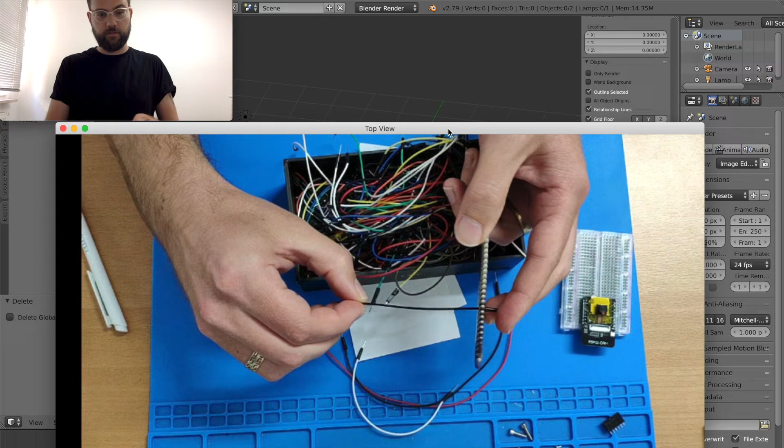The basic idea that I have is this: print a box that is shaped like a comb at the end, and we can just insert them like this. The box needs to be more or less the length of the cable, and we can just slide them in and keep them without getting tangled, and organize them by length and color, or print different boxes with different lengths.

We'll see. I'll start with the shortest one because this will take the least amount to print. If we have just this box and we leave gaps like this on the sides, just try to imagine it like this.

This will take ages to print because it will have to restart, recheck, and so on, and print the fans, and they will break off pretty easily because this joint here will be on a layer boundary, so it will just break off.

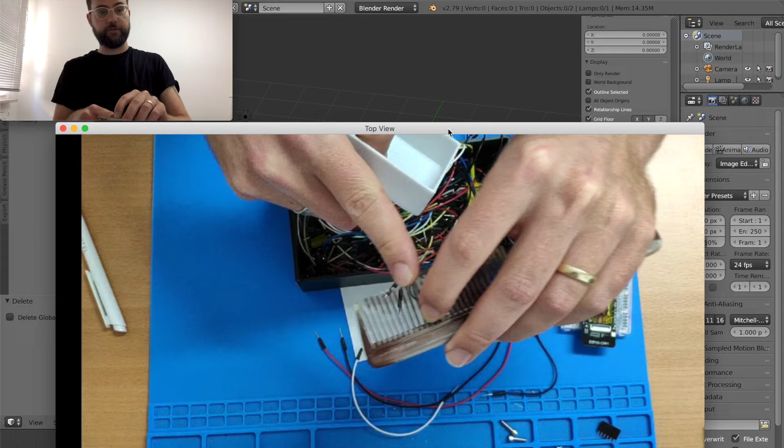And I'm going to challenge myself to come up with maybe a snap fit, so we can print it as one piece and then just lift it up and clip it together so it's a fast print and a durable model at the end that requires no other parts. Yeah, let's see how this goes.

Before I start designing this, I have to think about a few things. First of all, to get this mechanism to fold things up, my idea is to design it in the following way. That is idea number one.

If this is the floor of the box, here this bottom part, it needs to have a 45-degree angle, maybe a millimeter or half a millimeter gap with a single layer, and then it needs to have this 45-degree angle. So this will be exactly the joint where it will be folding. So it will fold inside here.

So I have the same thing, the gap, the angles again, and then this piece, and this folds up from the other direction. So it just folds up. This is the first idea. This is how it looks like in detail.

Now, designing this will be fairly easy. I have to just make up something that looks like this.

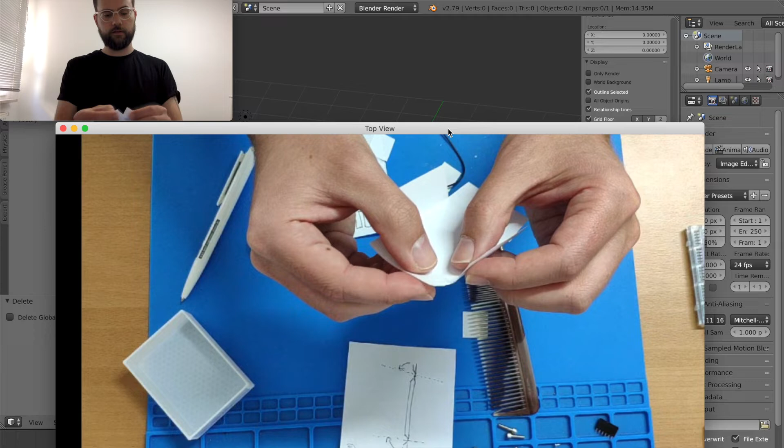And I need to find a way to make joints here, so if I make this a little bit wider on those sides, leave a gap here, design a little nose on this end, fold it up, it should just clip in, and it should not have any tension on any layer boundaries.

Let's see. It's going to go wrong in any case.

So this is Blender, and I'm just going to start by modeling the bottom main part and the sides.

I'm going to add a plane with a radius of 40 millimeters and size it along the y-axis by 0.5, so it's 40 times 80. This is where the cables will be stretched along.

Then I'm going to select this edge, move it to the center, grab it along the y-axis by 20, oops, minus 20. And because I'm lazy, I'm going to add a modifier, the mirror modifier, along the x and the y-axis, and then I'm going to move those to the center as well.

Grab it with G along the x-axis, hit X, and type in the number 40 to move it by 40 millimeters, and then it's exactly here.

If I take this edge, hit E and hit enter, then grab it along the y-axis, hit Y again by -2 millimeters. I get this wall bit.

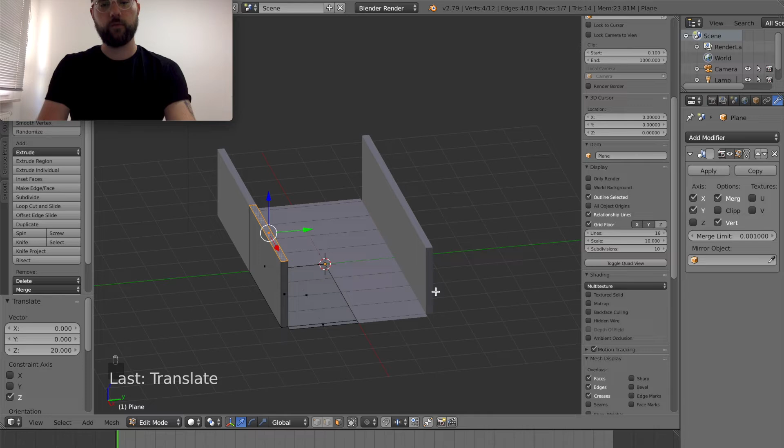Extrude it along the X-axis by 1 millimeter. Extrude it again along the X-axis by 2 millimeters, and then grab it along the Z-axis by 2, so at the other side.

This is 20 millimeters high, so extrude it again and grab it by 20 millimeters this side.

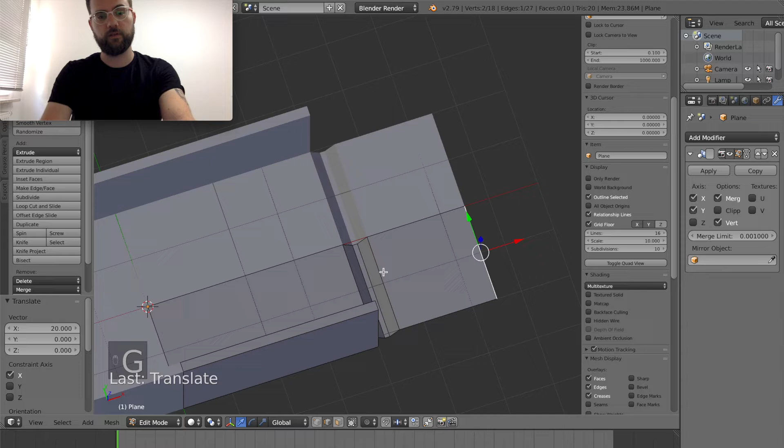So we have this. This will be the part that folds up, so extrude the edge, grab it along the Z-axis by -2 millimeters to go down.

This needs a thickness of 0.2 millimeters because I prefer printing at a layer height of 0.2 millimeters, so I'm going to extrude it again by 2 millimeters, grab that -0.2.

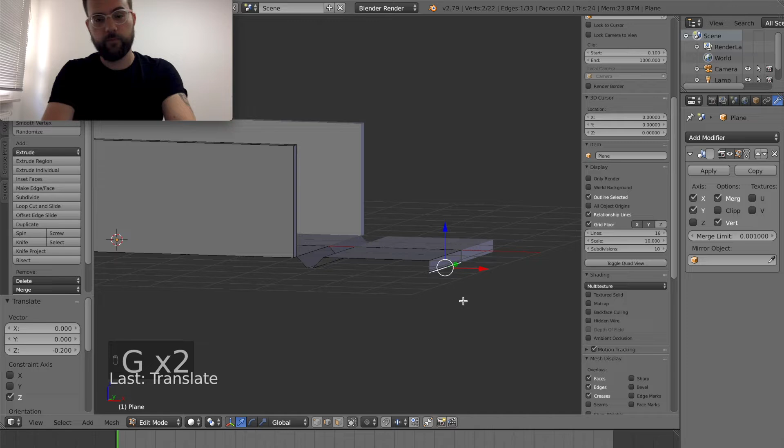I have to activate the vertex snap here at the bottom. X here.

Extrude, grab on the X-axis, extrude, grab on the X-axis again. So we finally have the bottom layer.

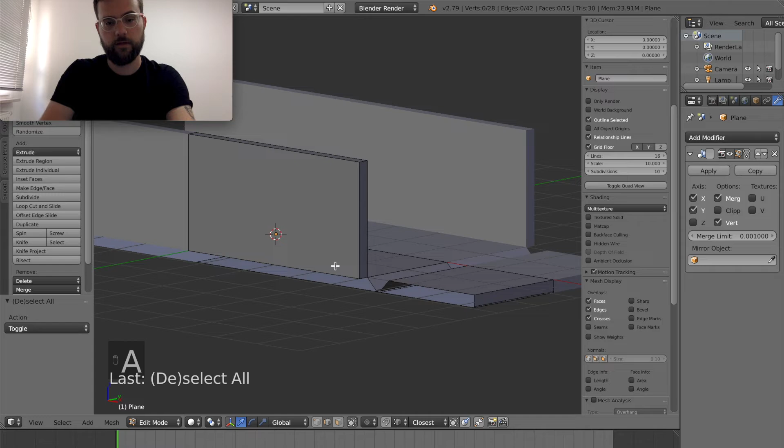Select this, extrude it, grab Y -2 millimeters. I have those sides that will connect somewhere around here.

So I'm going to cut this 2 times to get this face, extrude it by 3 millimeters.

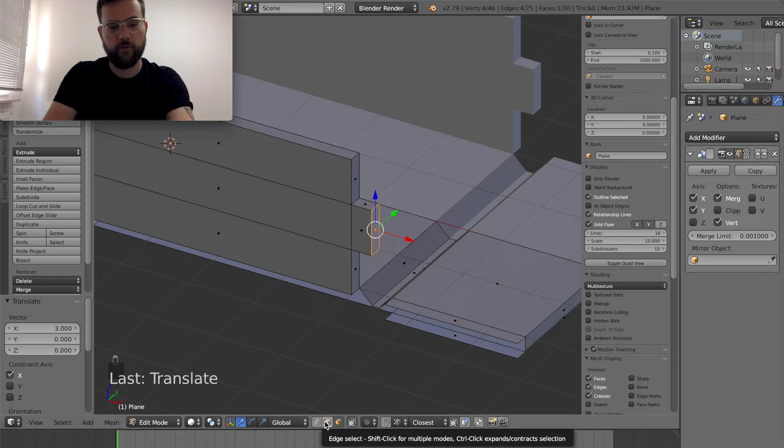I don't want to print with supports, so I'm going to grab those two, this edge, along the X-axis by 3 millimeters, so I have a 45 degree angle, which you can print as an overhang without any supports.

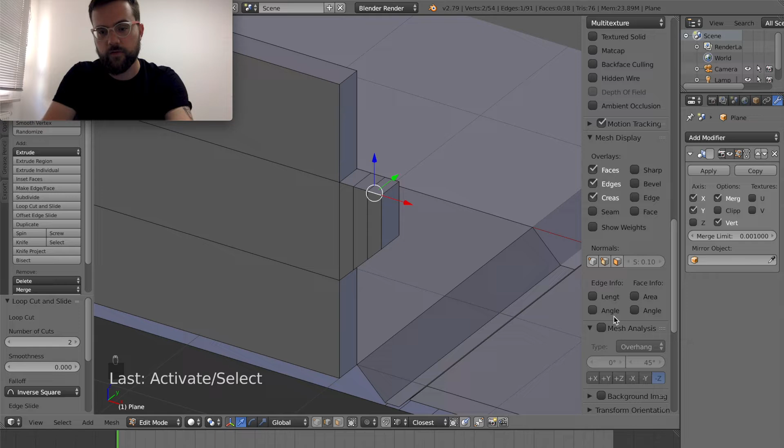I have to cut it 2 times, so I get 3 elements, so this edge here is 1 millimeter in length. What you can do is, on the right hand side in this menu, if you scroll down, you can select edge length and see the length of a selected edge.

So this one's 1 millimeter, so this is the part that will be sticking out of the side here. If I size this along the y-axis by 0.5, we'll have 1 millimeter.

Cut it again, size it along the y-axis to get this. So I'm going to grab this along the x-axis and pull it up in here.

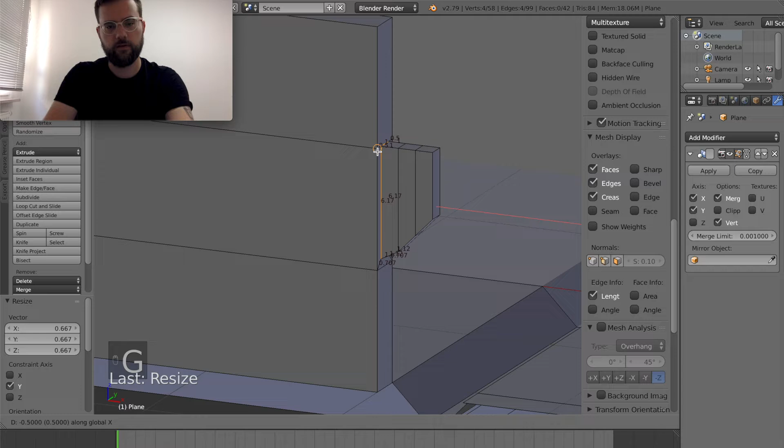0.5 millimeter, so by 0.5. So we get this fin here.

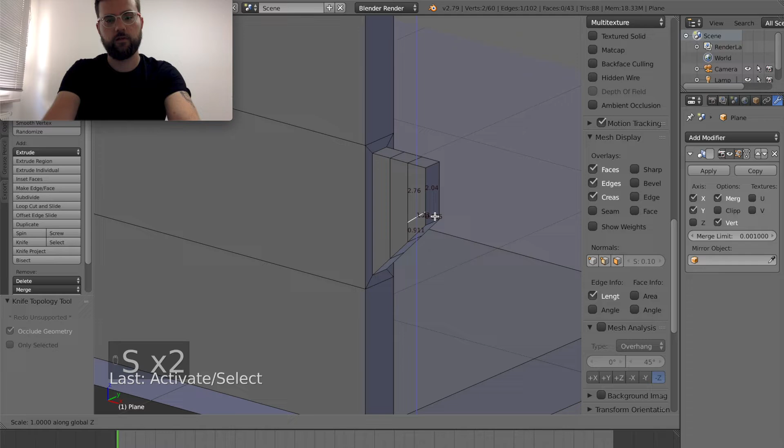This looks much better. Cut this face here. Size it along this, size along the z-axis and give it a size of 0, so they're exactly horizontal.

Extrude this by -0.5 millimeter. Just grab this edge and grab it up by 0.5 millimeter.

We get another angle here. Let's go to here and here.

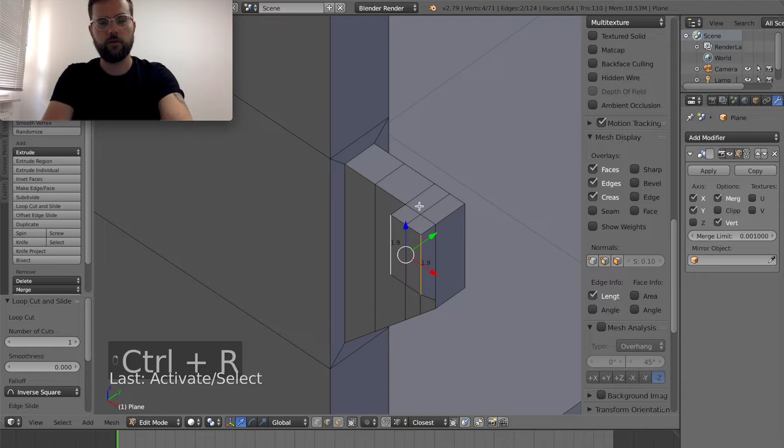Just make something like this. This should be able to squeeze through, something we have to add here.

So this is right in the center of those 20 millimeters. And then I'm going to remove those parts with a boolean modifier. You will see that. Let's close all the holes.

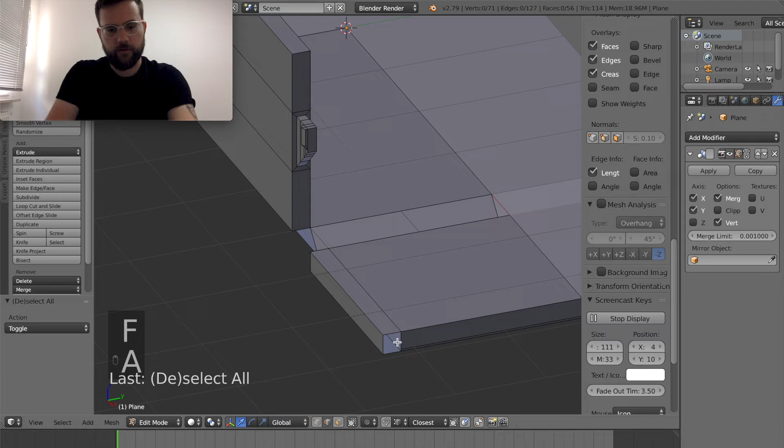So this is basically the model.

If we want longer sizes, we'll just select everything that's on the right hand side here. Go on to front mode, vertex selection, hit Z so we can select everything we see from this angle, hit Z again, then grab X and change the length for different sizes, which we can try later. Now to the fins.

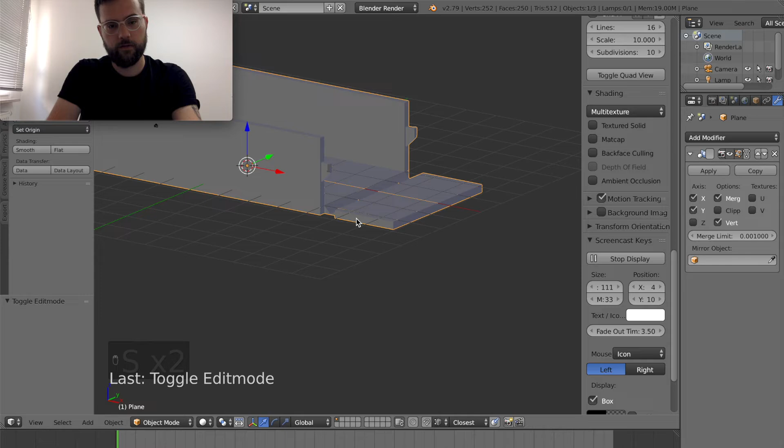Let's see how thick the cable is.

1.8 is more like it. Going to top view, add a cube, and give it a radius of 0.9. If we select the edge info length, we will see it has an edge length of 1.8 millimeters.

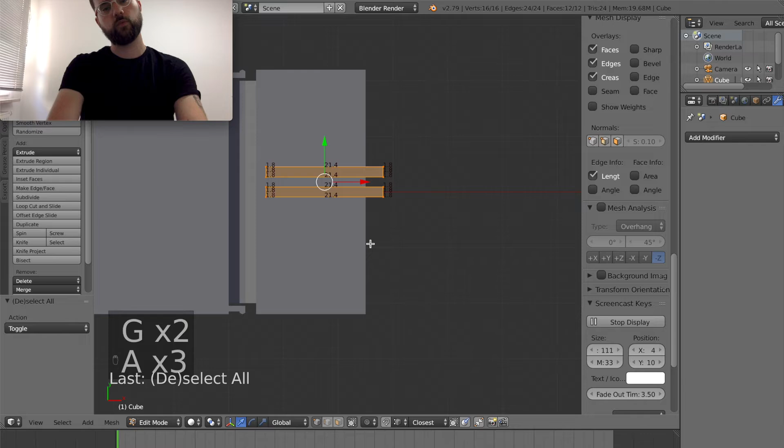Grab this bit to be outside of the object, and now we're going to grab this to go all the way here, and then grab x 1.8 because I like symmetry to here. Duplicate it, grab y 1.8, grab y 1.8, duplicate it again, grab this by 9, so this is centered now.

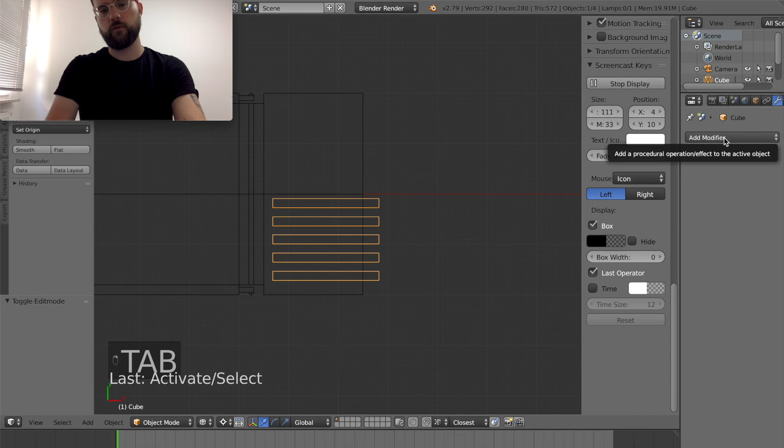If we add one more, we have 1, 2, 3, 4, 5 slots. Select this side of the box, grab it up to this point, and then grab y minus 0.9 to get the symmetry again. Now this doesn't need to get the mirror modifier because this object already has.

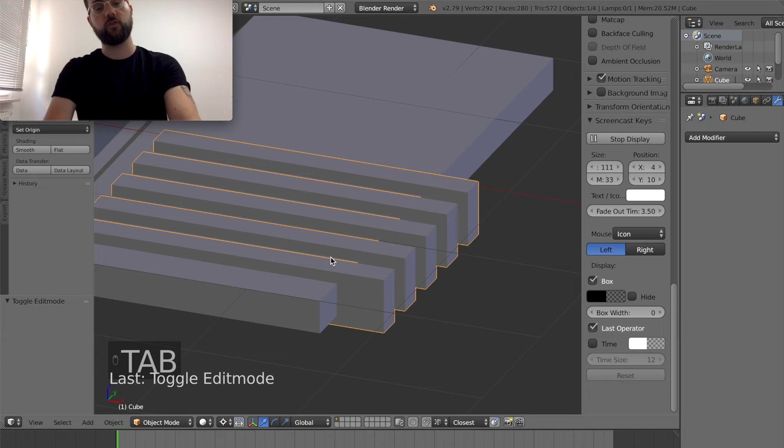So go into the front view, select everything, size it along the z-axis by a factor of 2, grab it a bit, and move it just so that none of those lines of this object are exactly on the same height or location as lines of the object you want to cut with. Which means, let's give this a name, bool.cut.

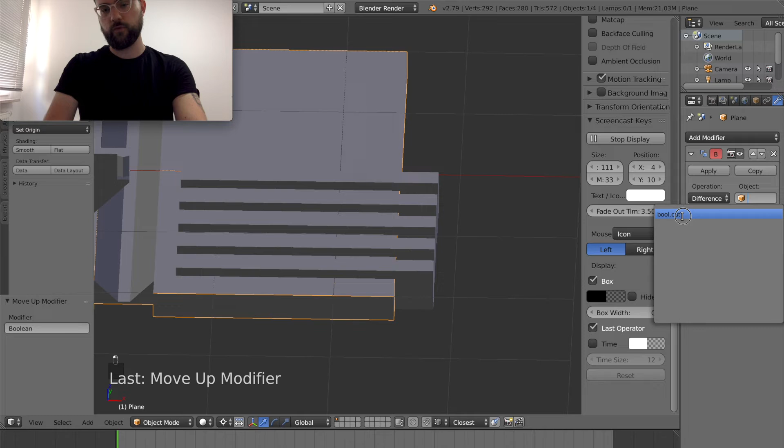Give this object a modifier, which is not the mirror modifier, but the boolean modifier. Move it upwards in the hierarchy. The operation type is difference. Select the boolean cut object, and we will see when we move this to a different layer, we'll have those fins.

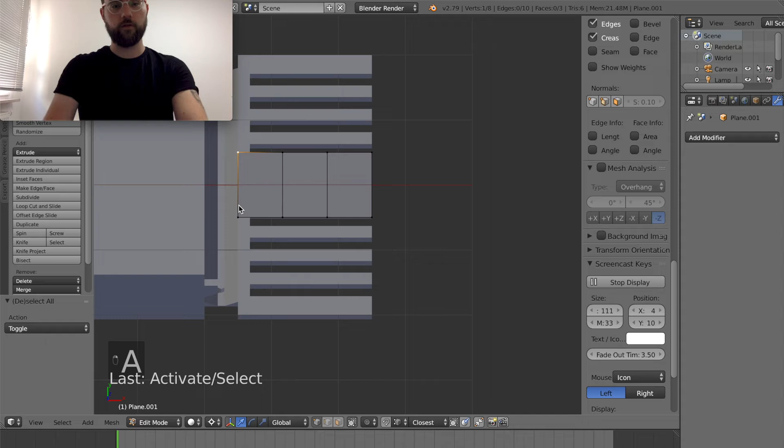Now what's missing is the hole on the side to cut this out. So I want to put this into exactly the thirds, so I'm just going to select those and then cut it. Let Blender do the math and then remove the outside edges again. Then top view, move it here to the bottom, select the bottom vertices, grab Y here. So if we remember correctly, we saved 0.5 millimeter here, so let's give it more than that.

So let's think for a second. If we just move by 0.5 millimeter here and 1.5, 0.5 millimeter here, this will be an exact fit, but we don't want that. And also we want to give it some wiggle room, so we're gonna size it.

No, let's select not around 3D cursor. The pivot point should be around the median point. Size along the X by 1.5. That should do it. So it should be a bit flexible. Let's hope. Let's see what happens.

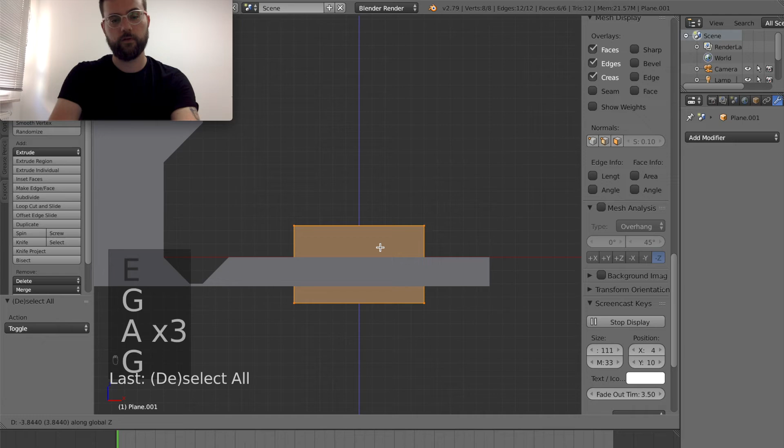Well, the nozzle is going to be 0.4, so we can give this, grab y 0.1 millimeter here and y minus 0.1 millimeter here, so we have exactly one perimeter here. Let's see what happens. So just grab this up a bit, extrude, grab it down. We have this block here. We're going to call this bool cut clamp snap.

Move it to a different layer. Select this again. Add a modifier. Boolean difference snap. And if we're lucky and have the right ordering, this should work. So this should actually work in theory.

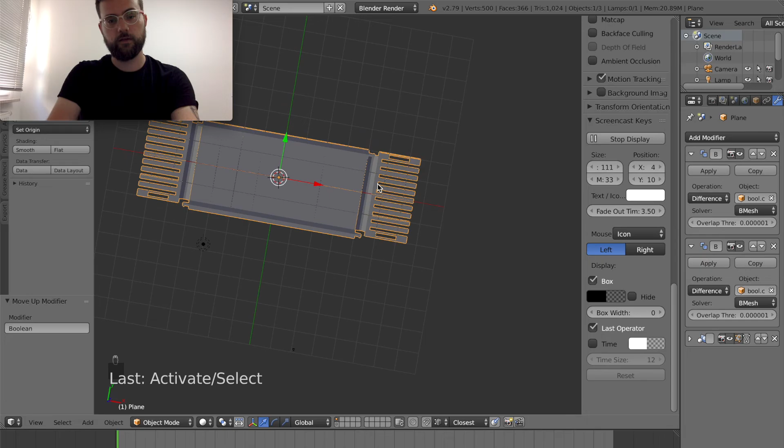Let's save it. Let's select this object and export it. We have the right object. Now we can print this. Now I'm not entirely happy with it yet. These edges here, for example, tend to break easily, so I'm going to

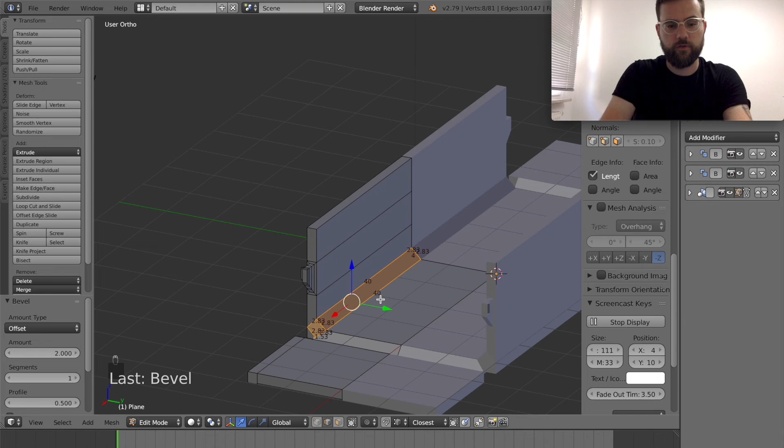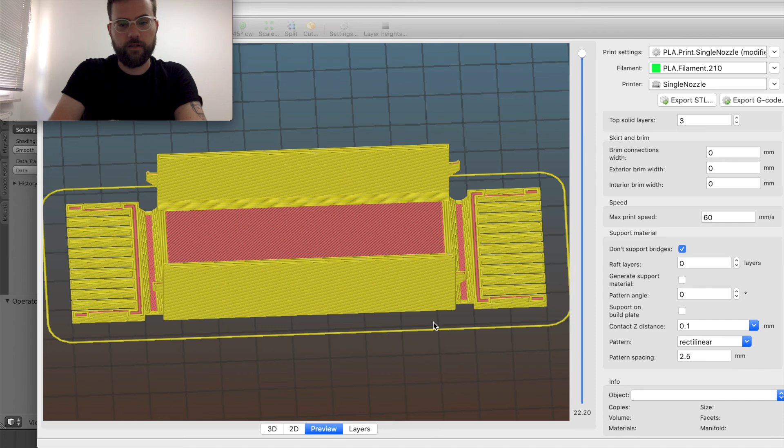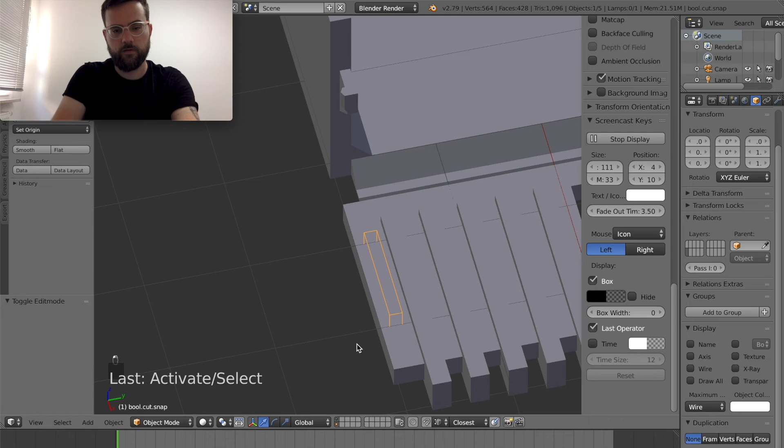Let's look at the preview, and the preview looks like this. This is going to break here. So let's fix it in the model. And this has now 2 perimeters which should give it more strength.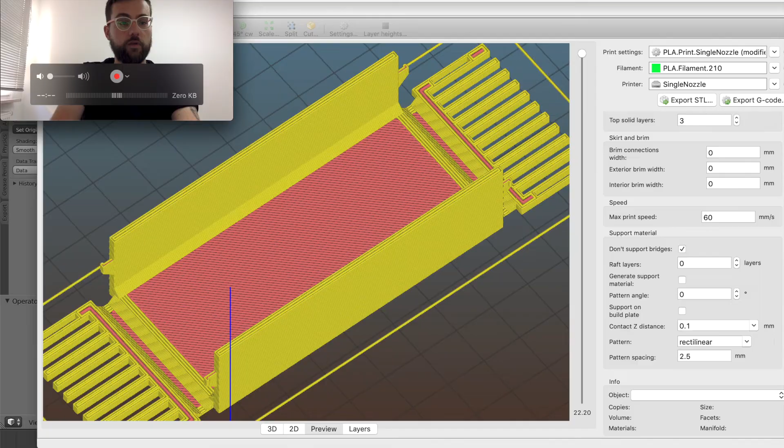So let's print. So about 1.5 hours later, and exactly 3 attempts, I managed to print this. Let's see if it actually works out as planned. First thing I noticed is that the holes here are not entirely perfect, which is due to the nature of my printer. And I have to clean those up a little bit first.

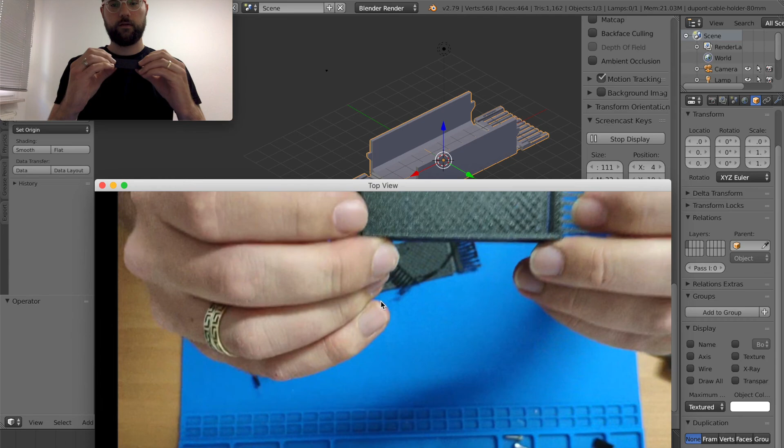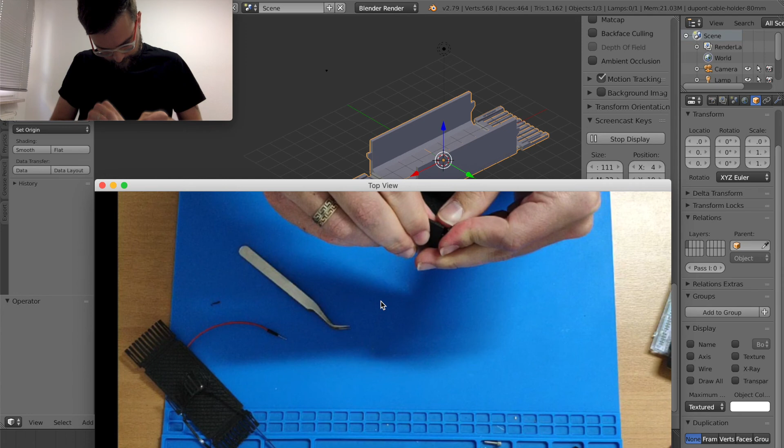Let's see if this works. No. Have to wiggle it open a bit, and then it should work. Okay, this side is good. After about a couple of minutes, it actually fit. So it looks like this. Let's try it out.

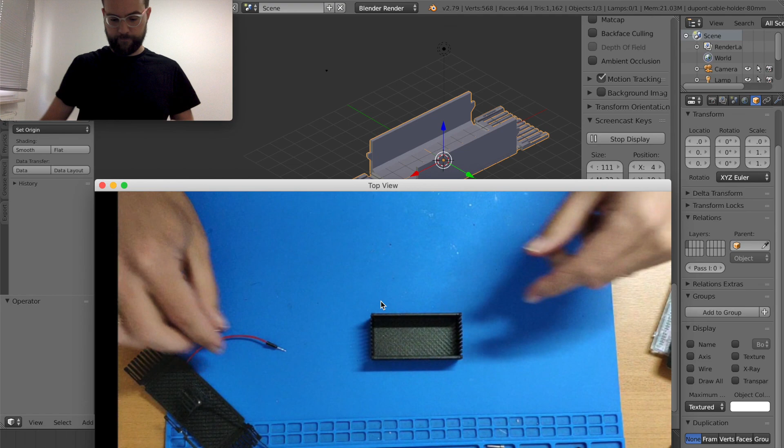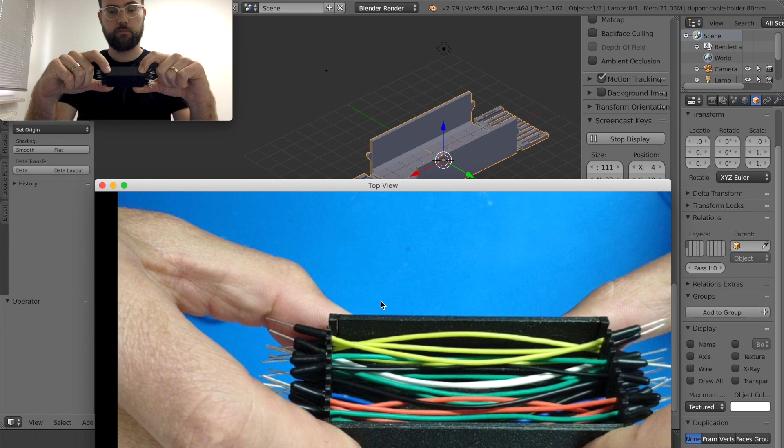This seems to work. I will print a couple more of those, and this should in the end look a lot better than this.